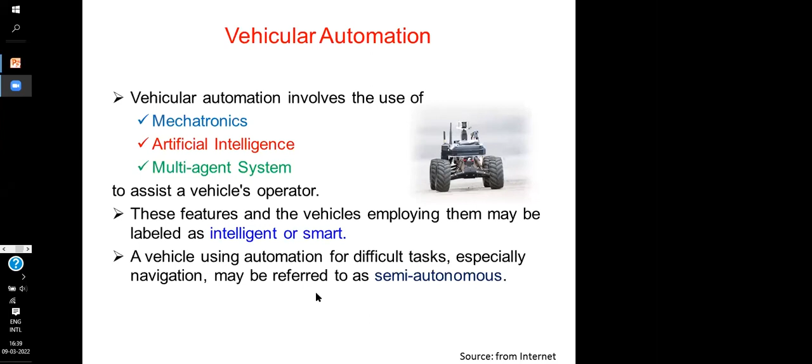So vehicular automation involves the use of mechatronics, artificial intelligence, and multi-agent systems to assist the vehicle operator. These features and the vehicles employing them may be labeled as intelligent vehicles or smart vehicles. Vehicles using automation for difficult tasks, especially navigation, may be referred to as semi-autonomous vehicles.

What is an autonomous car? Basically, it is an autonomous vehicle capable of fulfilling the human transportation capabilities of a traditional car. It is capable of sensing its environment and navigating without human input.

The history of autonomous vehicles: first, in the 1920s, a transmitting antenna. In 1930, embedded circuits and radio controllers. In 1950, detector circuits, special radio receivers, audible and visible warning devices. In the 1960s, electronically controlled highways, powered and controlled by buried cables, wayside communications relaying computer messages.

In the 1980s, laser, radar, computer vision and autonomous robotic control, off-road map and sensor-based autonomous navigation. In the 90s, extensive system engineering work and research, video cameras on board and use of stereoscopic vision algorithms. In 2000, real-time control systems, RFID tags. In 2010, artificial intelligence, GPS, LIDAR, 3D mapping, cameras, sensors, etc.

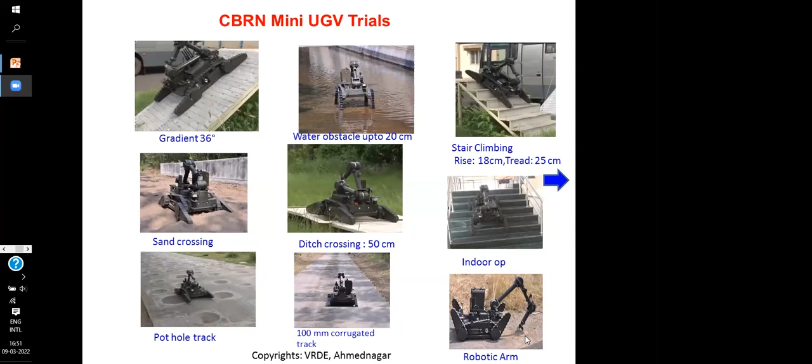This is a 100 mm corrugated track, and this is a robotic arm used for manipulation, that is sample collection of an NBC contaminated zone. This is a small video clip of the CBRN UGV.

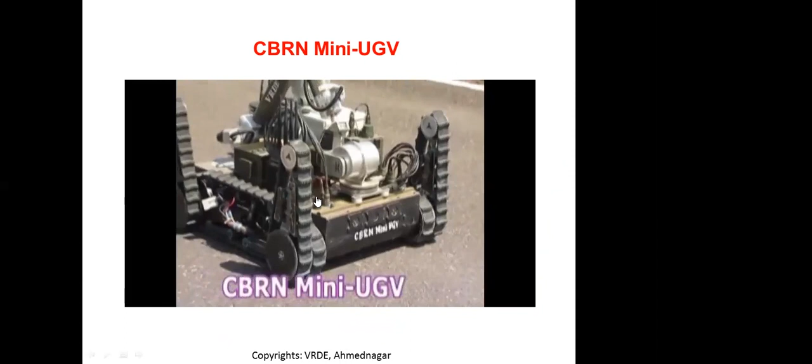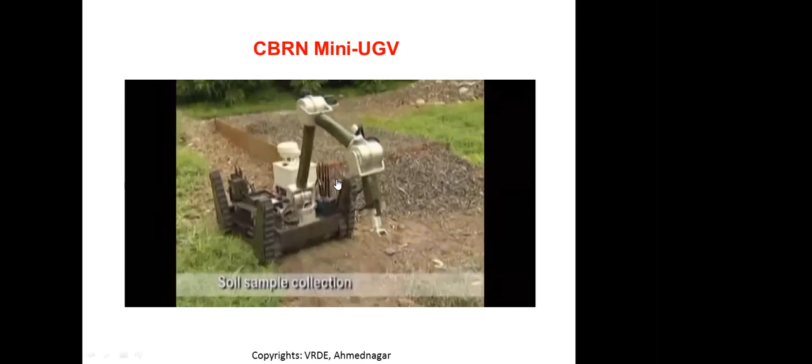This is the maximum speed, it will go 6 km/h. This is soil, it is collecting the soil using the robotic manipulator. It will collect the sample and bring it back to the mobile laboratory for determining the contamination levels.

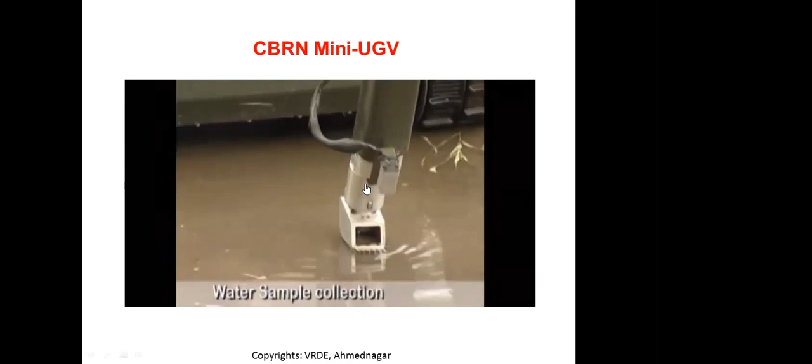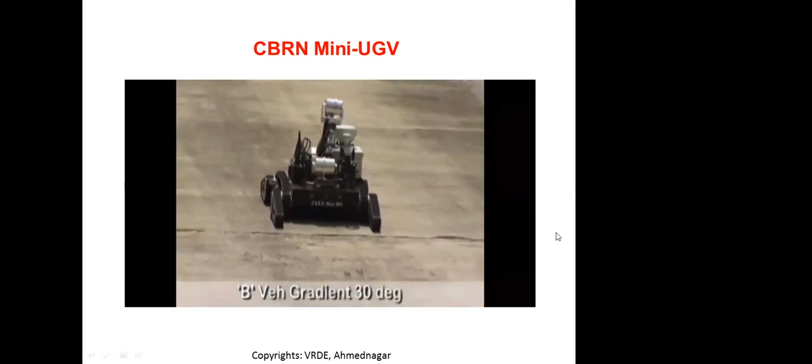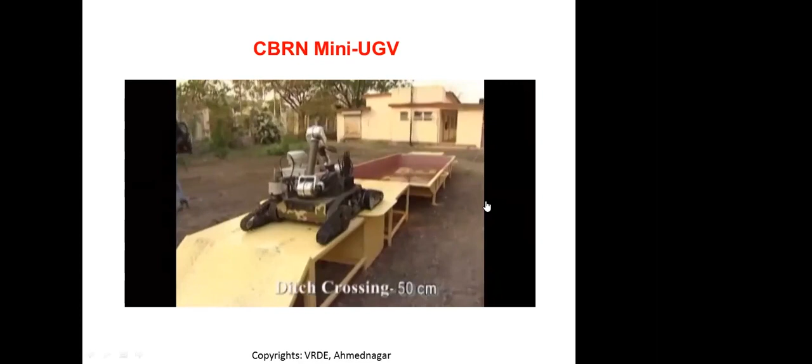This is a B vehicle gradient. The actual B vehicle will cross this kind of gradient at 30 degrees. This is a ditch crossing of 50 centimeters, and obstacle crossing up to 25 centimeters.

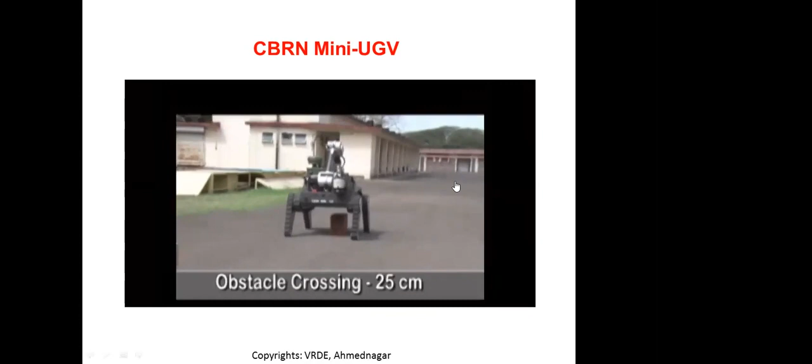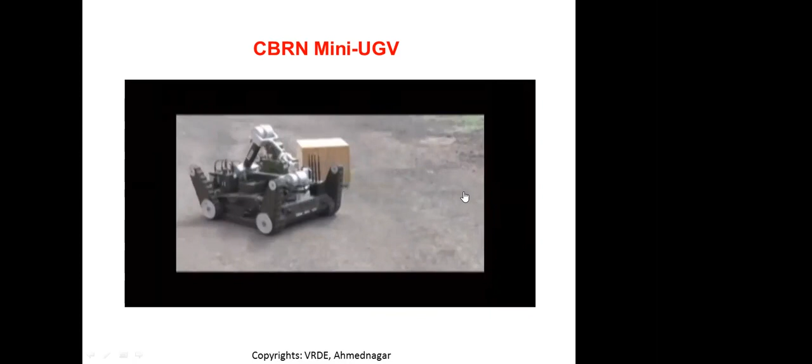Obstacle detection and warning. The present status of this UGV is that we are going to transfer the technology to Indian industry. So this is the present status of this vehicle.

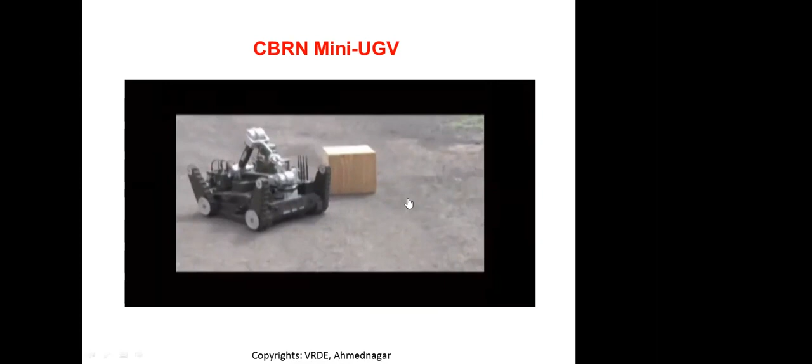One more thing, we have carried out multiple sensor fusion using probabilistic methods. We have used three different types of sensors: radar based on Navtech UK, a 2D SICK sensor, and one more sensor which is a 4-layer 3D lidar. We have mounted these sensors on a Tata vehicle test platform.

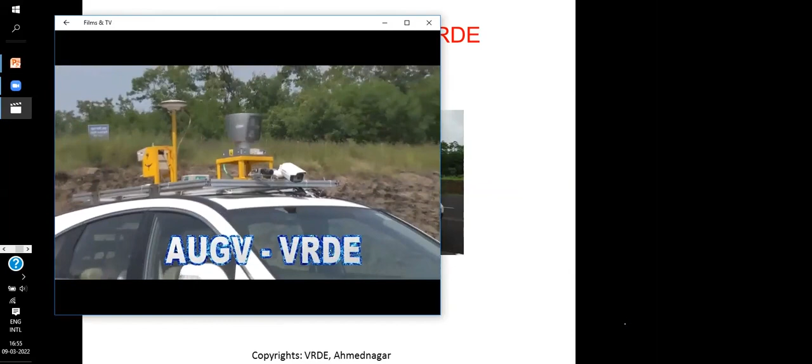This is the inside of the vehicle, the cockpit side, where he is feeding the input, that is the waypoint information. This is a drive-by-wire system.

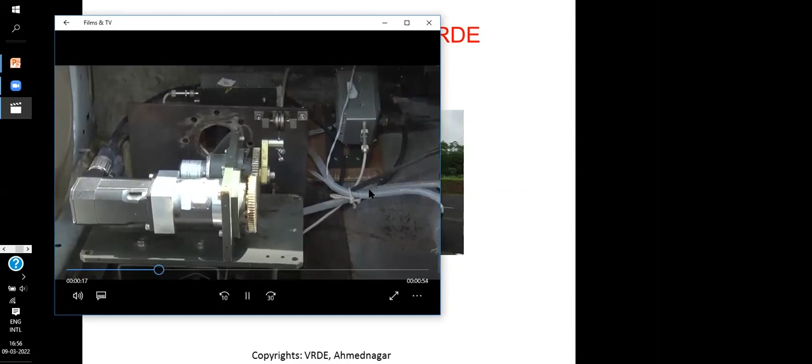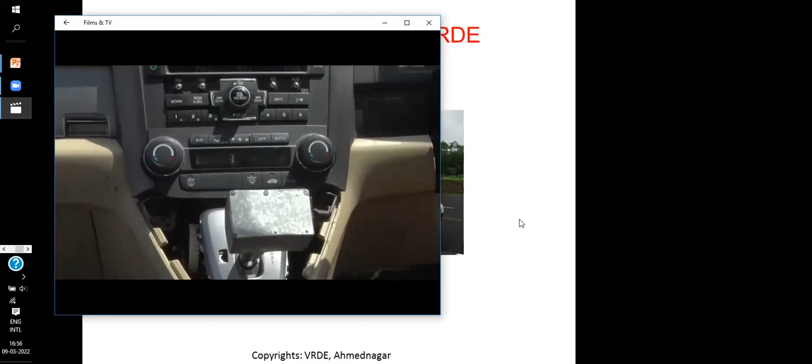We have done this experiment on a Honda CR-V vehicle. We have tested this at our National Automotive Center at VRDE, Ahmednagar.

Coming to this autonomous UGV, we have developed it using a probabilistic algorithm, that is, a classical algorithm. In the next stage, we want to move toward an AI-based architecture. For that, we need industry participation for the perception part, especially for obstacle classification, segmentation, and obstacle tracking.

Similarly, for the vehicle navigation module, we need AI-based motion planning and control. Perception involves road traffic segmentation, lane detection, and pothole and bump detection. These are critical areas because in urban driving you may not face these issues, but in an army scenario you have to face this. There will be many ditches, lots of vegetation, and this is a very critical application for army scenarios. There will be no structured roads, and there will be snow, rain, and many other conditions.

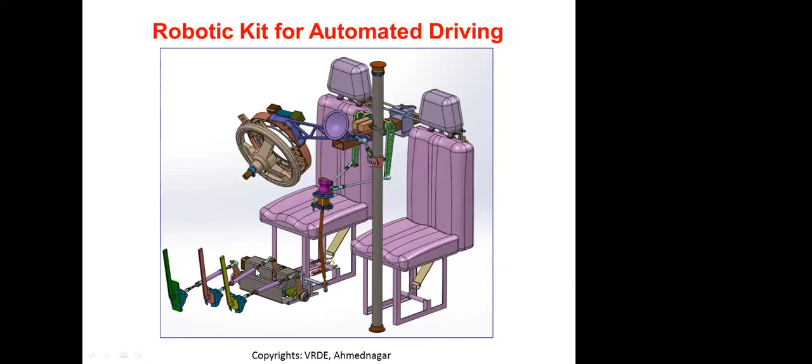First, initially we need to do the calibration work, how much actuator setting we will keep. After that we'll do this operation. The salient feature of this is it can be configured for both LMV and HMV. The driving robots concentrate on pedal robots such as accelerator, brake, clutch, steering robot, gear shift robot, parking brake, and modes of operation will require calibration. Initial calibration is required for a new vehicle.

A software suite will have perception, localization, navigation, control, actuation, supervisory, and mission planner modules. The SAE level we are targeting is 3 only. The communication range is 1 kilometer line of sight and 500 meter non-line of sight.

Safety features: we are having health monitoring, geofencing, obstacle avoidance, emergency stop, auto stop based on software intelligence, remote operation from OCU. There will be one fail-safe brake in addition to the vehicle brake system. When the vehicle brake fails, then the fail-safe brake will take over the vehicle. There will be a base station for controlling this modular robot vehicle, as well as to transmit mission parameters.

This is the block schematic of the robotic kit. There is a pedal robot: accelerator, brake, clutch, and steering, gear, and parking. And there is a perception control. It will sense data from the perception sensor using 3D lidar, radar, and camera. Automated driving control will take the localization sensors as well as perception data. This will give the automated driving operation for the modular driver robots, and in addition will transmit information to the OCU through wireless communication.

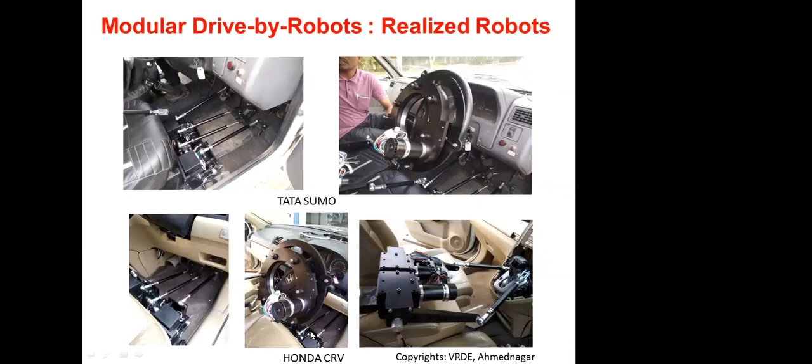Coming to the conclusion, compared to civilian applications, defense applications are very huge. There will be no restriction on employing automated guided vehicles in defense applications. It will act as a force multiplier, hand in hand with soldiers. It is having more teeth with C4ISR for command and control, communication, computers, intelligence, surveillance, and reconnaissance purposes.